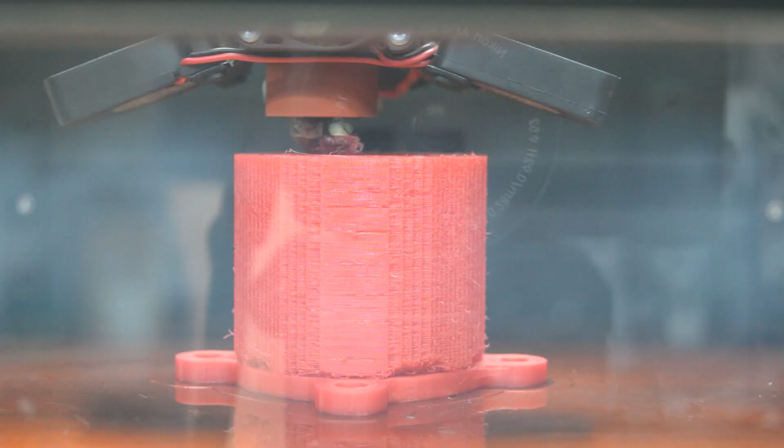Using this model, we had to redesign the whole intake system to meet Formula Student rules. First, we did a new restrictor. Because this is the most critical part of the intake system, which determines how much air can flow through the engine, we tried out some new methods to improve the airflow.

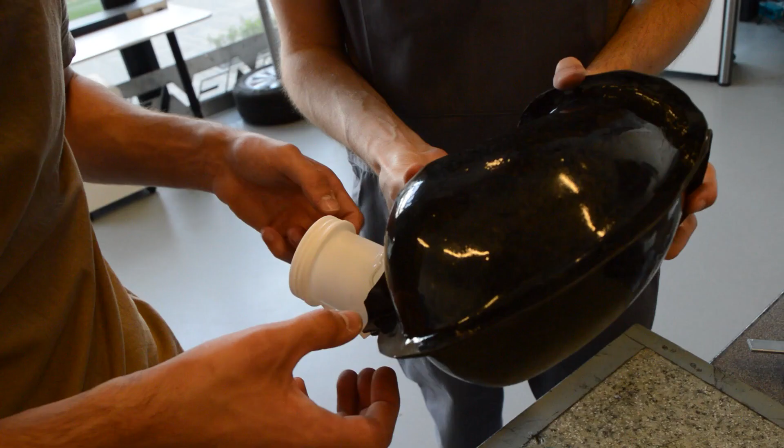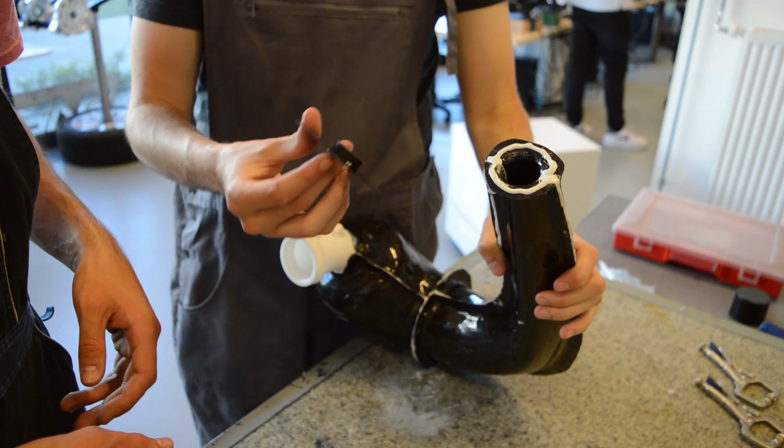The 1D model also helped us to make a new airbox. Compared to the previous years, we made a smaller 3.5 liter one, which will make the engine more responsive for the drivers. We also did 3D CFD simulations to make corrections to shape and size using that knowledge. In the manufacturing process, we also tried out something new, a forged carbon outer layer, which improves the strength and also the looks of this part.

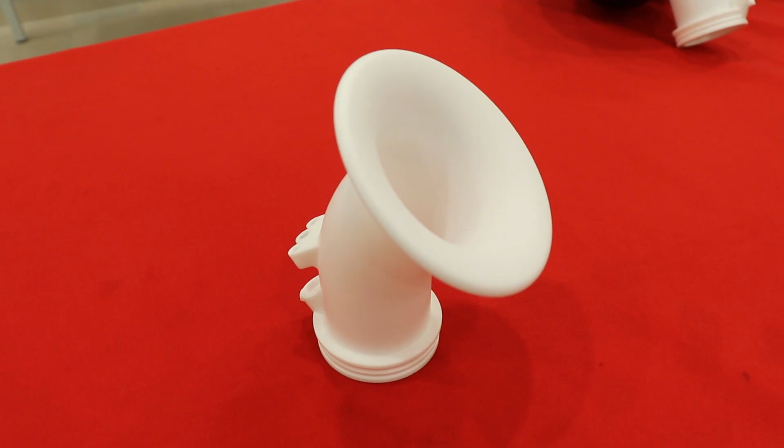The intake manifold also has a huge effect on the performance of an engine. Other than choosing its length correctly, the smoothness of the airflow is also important for us. This depends on the shape of the manifold, but also its surface. The surface treatment was done by Varinex, who kindly helped us making this part with a one-of-a-kind technology even in Europe. We asked Krzysztof Bukovac from Varinex to speak a little bit in detail of the mentioned process.

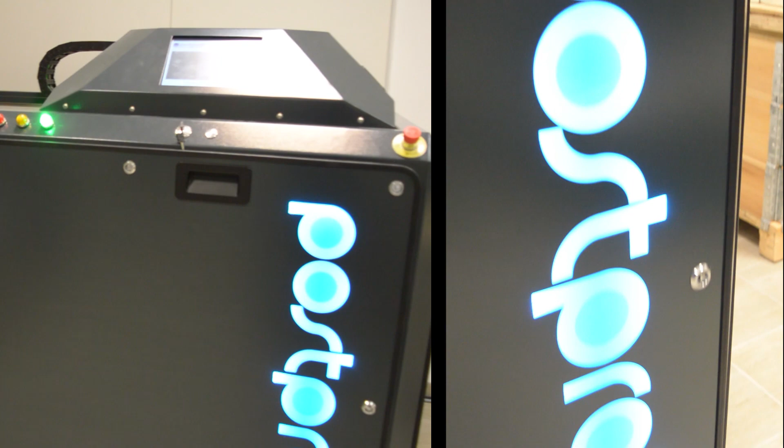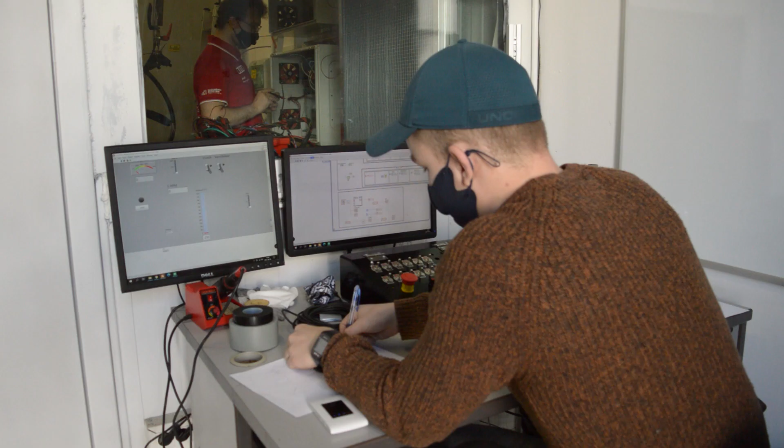This year, the main task of our department was to renew the electrical measuring system of the test bench. The new measuring equipment has been properly placed, so the compact arrangement takes up less space in the room, and it became even more transparent and reliable thanks to professional cable management.

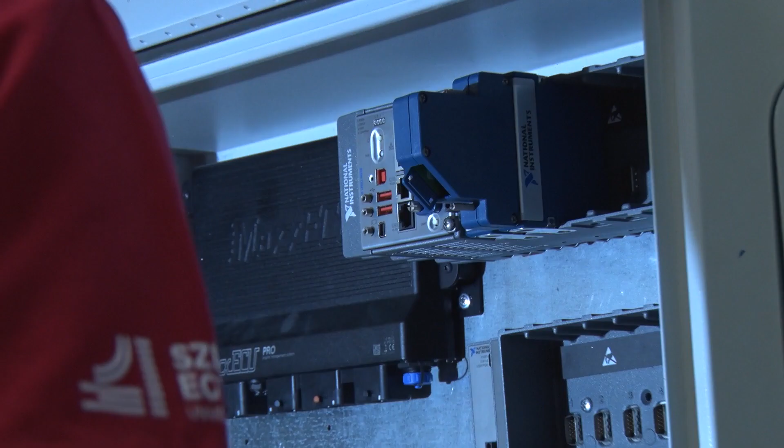The MaxxECU Pro has also been placed in the boombox, which has many built-in sensors such as a dedicated measuring device and is also able to log the measured data. Therefore, we can ensure the safety of the engine and equipment. If we see extremities, we know there is a fault somewhere and we can fix it.

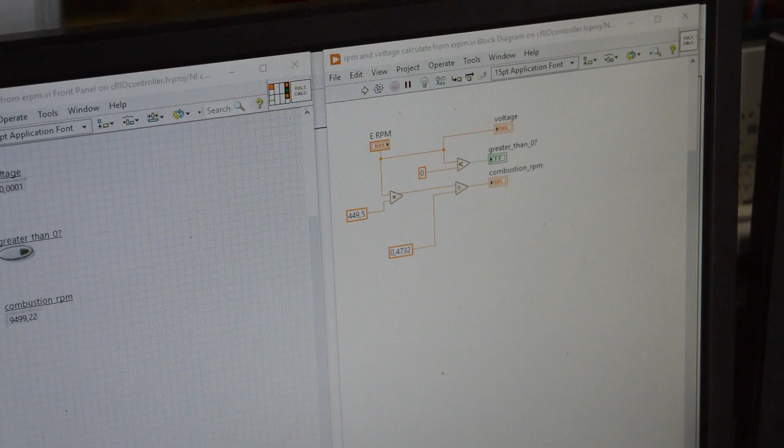Our measuring system is based on the NI Compact RIO industrial computer. It performs the power and torque measurements as well as monitoring other operational conditions such as temperature and pressure values, and also controlling our inverter, so the speed of the brake motor. The software behind all this is also made by our team and now has a clean and easy to understand user interface.

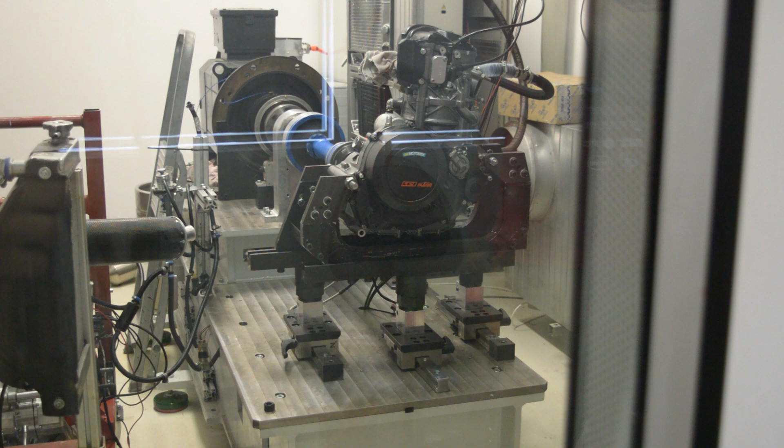The car is installed with the Max ECU Race, which is waterproof, and next to its small size and weight, it has more than enough I/O communication ports to integrate into the car system. On top of this, from now on, every power unit is supplied with a dedicated engine side wiring harness, which is detachable from the one in the vehicle.

The Bosch 32 throttle body was chosen because it is plug and play with the Max ECUs and easily accessible, as well as being suitable for use in a self-driving vehicle.

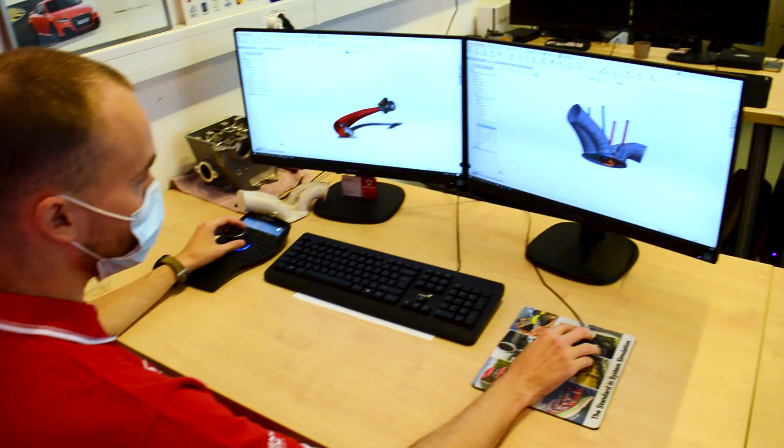Hello, I'm Daniel, head of the design department. Our department of 11 people is responsible for design and manufacture of the test bench and other components, but due to changes in concept, we are mainly focused on reverse engineering.

For reverse engineering, the first step is to have a high-quality 3D scan of the stock engine parts, which has been achieved with the help of Werth Magyarország Kft. The company works with advanced measuring technologies and provided us with these point clouds extremely fast and in outstanding quality.

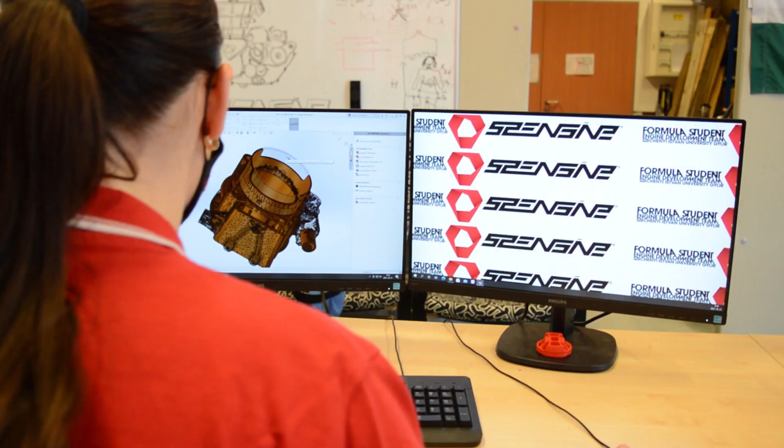This process was new to everyone on the team, so we approached a company called CAD-CAM 3000, dealing with reverse engineering. During an online workshop, we were able to increase our knowledge about the whole process. Moreover, we are continuously consulting with one of the engineers of the company, who helped us create various support geometries.

Reverse engineering is widely used in the industry, either when building a product similar to another one that does not have a 3D model, or when the product has deformed from the original 3D plans and the new product must follow the deformed geometry. Furthermore, there are still a lot of products without 3D documentation. Some of it is highly valuable, like a turbine blade or an injection mold tool, which must be reverse engineered if broken in order to remanufacture it.

Team SZEngine contacted us about half a year ago with the request of helping them make a fully parametric 3D model of a KTM 690 engine based on 3D scan measurements.

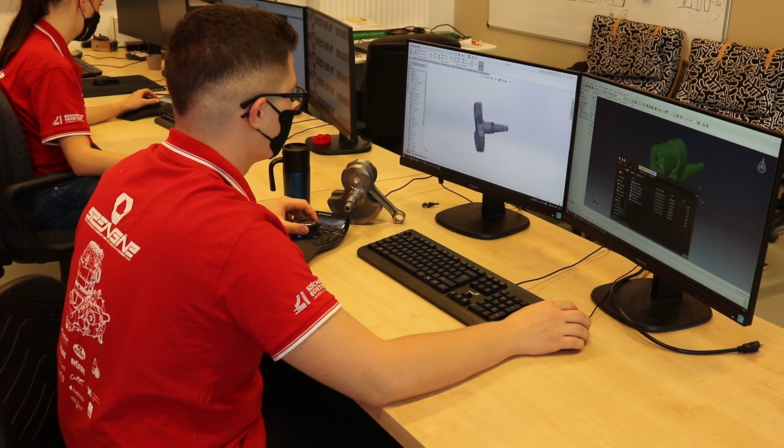We were happy to share our experiences with the bright minds of the team, and based on our guidelines, they were able to create the parts one by one. Nothing proves their motivation and commitment more than the fact that they are doing their studies and this development at the same time. We believe that they can learn a lot from doing these projects by using and expanding their knowledge from the university.

The first version of Unique Crankshaft has been completed, which will operate in our next engine generation as soon as it's manufactured. It is important for us to follow and apply the latest technologies. Therefore, the complete valve cover will be 3D printed with help of Varinex Kft.

Hello, my name is Mark Pap and I am the test bench leader. Our test bench has undergone some huge changes over the last 6 months, so to speak, completely renewed. The building has been completely renovated and we rethought the structure of the air supply system.

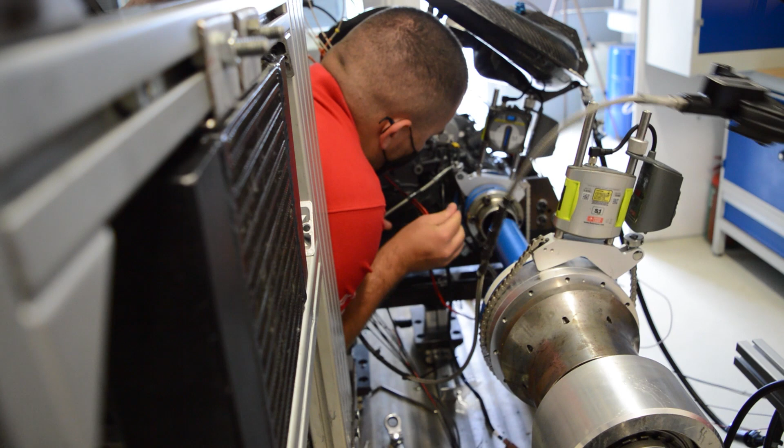Unlike last year's construction, the fresh air is not directed to the airbox, but similar to the industrial test benches, the total air mass of the room is continuously exchanged, so the airbox freely takes the necessary air out of the room, further simulating real conditions.

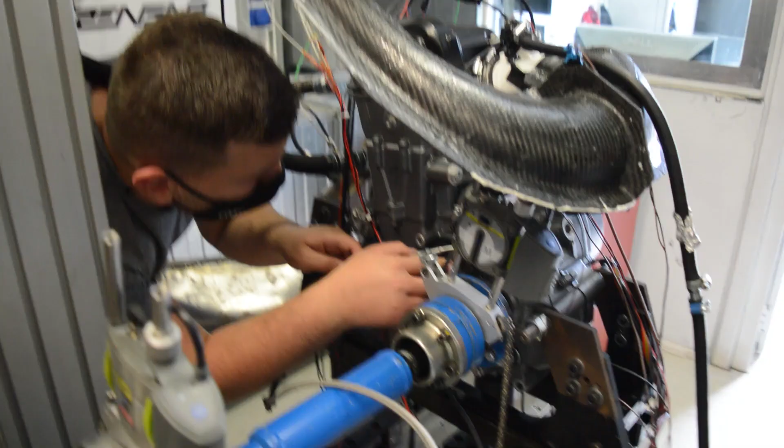Similar considerations have been taken into account in the layout of the test bench structure. It can be easily installed in addition to simulating conditions in the vehicle. The MAX ECU Pro takes care of the engine controlling and automatically logs compared to the previous ECU and stops the engine in case of errors. The calibration and the evaluation of the measured parameters are being done from the other side of the bulletproof wall.

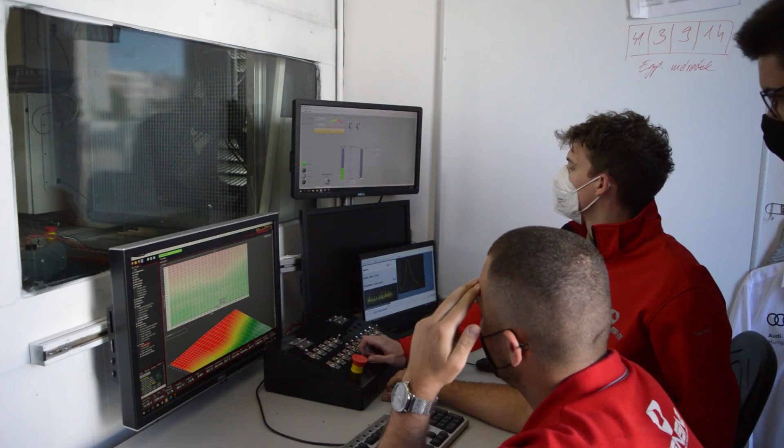Mark presented so many hours of work in a little time, but there is more. One of our previous team members, Fabio Fejes, and his company, Revotech Kft., also had a huge role to bring this alive. Let's hear their thoughts.

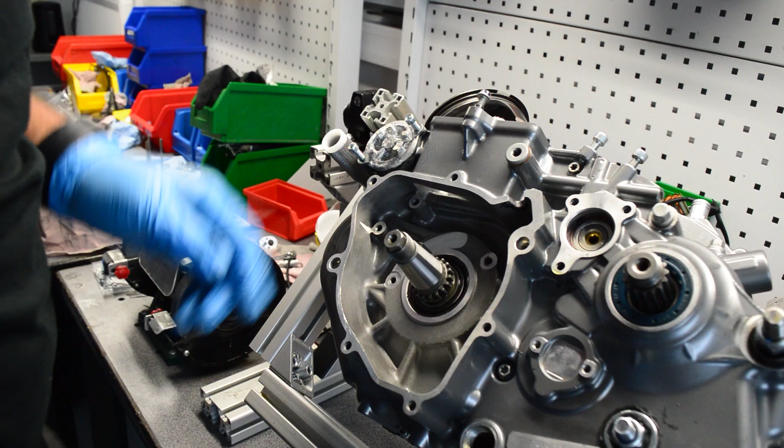The other direction of development was to set up a better cooling system for our new internal combustion engine. In favor of reaching it, we made some changes in the thermostat and we use an external water pump with better mass flow rate.

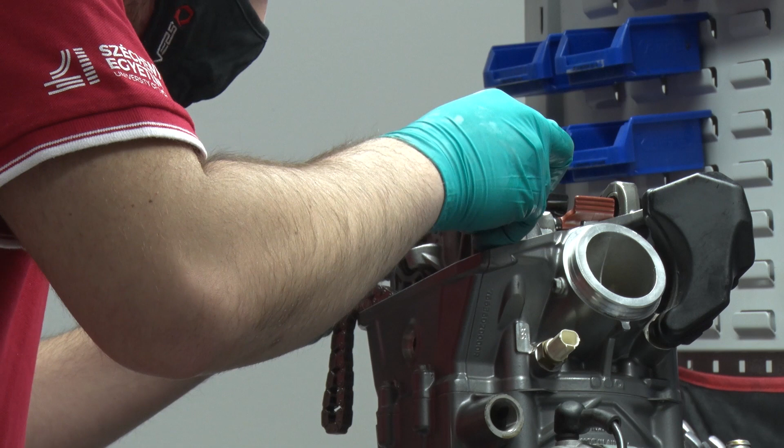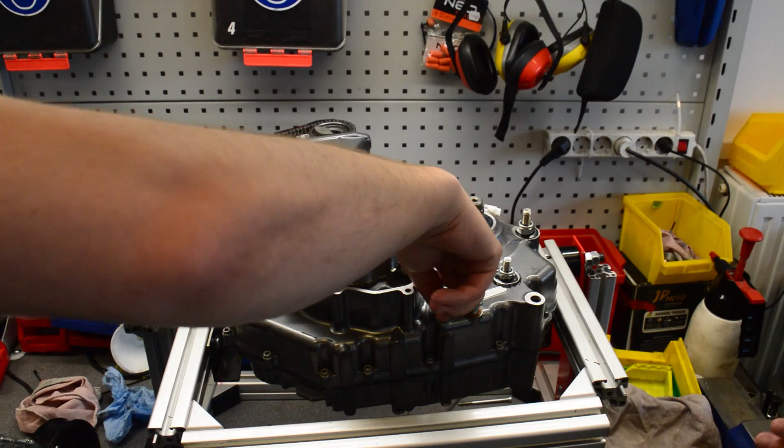The 4-speed sequential gearbox: we got rid of the 1st and the 6th speed of the basic engine's gearbox because it's perfectly suitable for the Formula Student tracks. Our main development was to create a 1-speed gearbox for the test bench. This is necessary to make sure the electric motor's revolution interval covers the engine's RPMs from idling to the red line. This engine marks the start of a new era for SZEngine.

This summer we aimed at Formula Student Austria and East, so we are optimistic that we can finally show at the competitions what our engines are capable of.